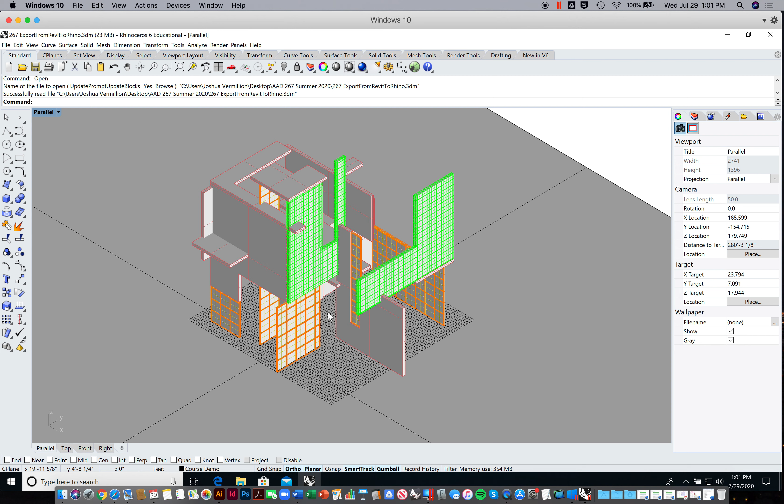You'll notice I'm in parallel view, but I have this ground plane and tile pattern I made on the ground plane from the plan view. This is set to parallel, so I'm going to go to the viewport, set view, and set it to perspective. That way I can easily see this thing.

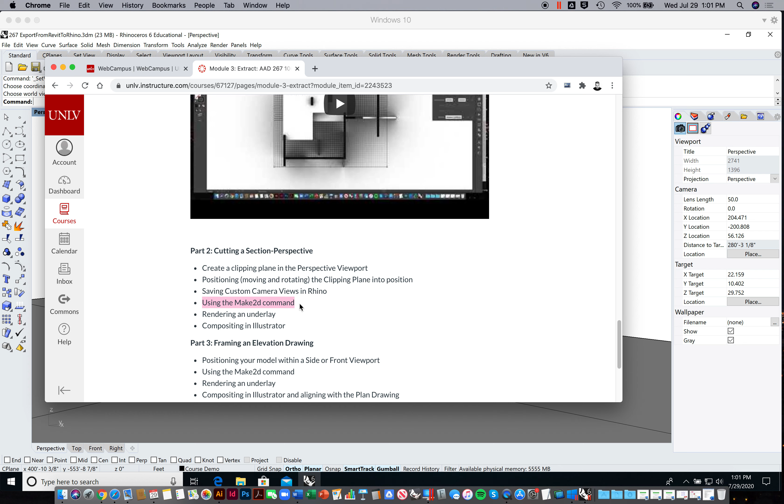I'm going to go through this outline quickly to make sure I get everything ready. We're going to create a clipping plane in the perspective viewport, move it into position, and pick the most interesting section perspective I can make. I'll save that view, which is really important. Then we'll cover these old things you're getting used to now: make 2D, rendering with soft shadows, and compositing everything back in Illustrator.

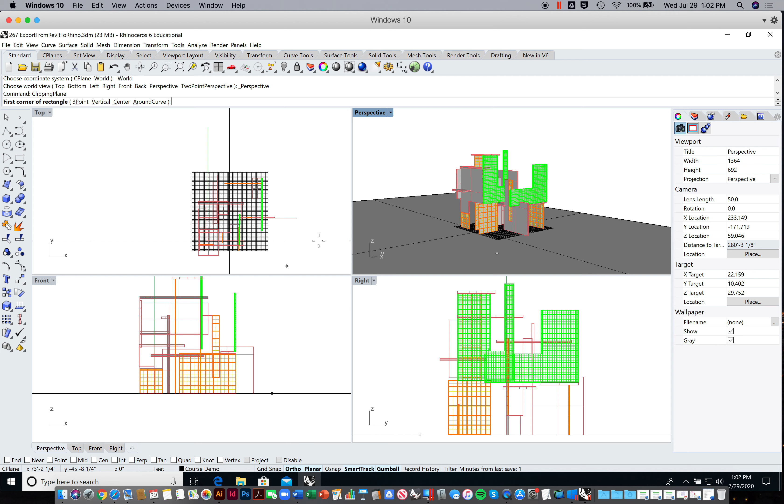I'm going to toggle back to my 4 views at once. In my perspective view, I'm going to type in clipping plane. It's going to ask me to draw my clipping plane. I'm going to draw it in one of my side views, like the right view. I'll just click and click. There's my clipping plane, and you can see it's showing up in the perspective view.

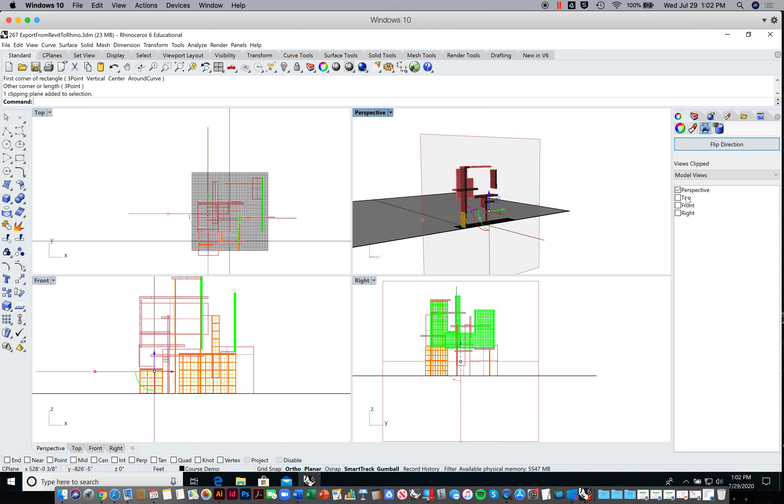I'm going to select my clipping plane. If for some reason it's not showing up in the right viewport or you need to change it, I can go to properties, go to the clipping plane properties, and change the direction that it's clipping. I can also change which viewport it's displaying in, so I make sure I have perspective clicked on, and double check this.

I'm going to position my screen, tumble around, and sort of center this up vertically. I'll also use the gumball to move that clipping plane a bit until I get an interesting place here. I'm cutting through a curtain wall, cutting through some vertical planes and horizontal planes, so walls and floors. I'm showing some things in the background. Most importantly, you want some sort of spatial and volumetric variety.

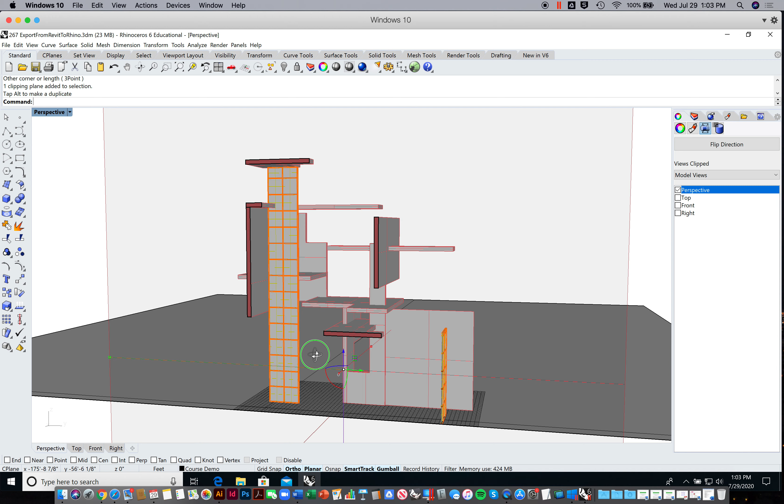So I have some multi-story spaces here. You can see balconies overlooking other balconies, and my floor plane extends out so the indoor space flows to the outside. Now I'm going to try to center this up a bit, centering it vertically as well, so the amount of space here is about similar to the amount of space here. I want to make sure my ground plane extends all the way through my viewport. That's important, and that looks pretty good.

Let's double check our checklist again: positioning, move the clipping plane. Once I have that exactly where I want it, I'm going to save this view. It's really important, because if I accidentally mess something up, I want to be able to go back to this view and do the make 2D or render and that kind of stuff.

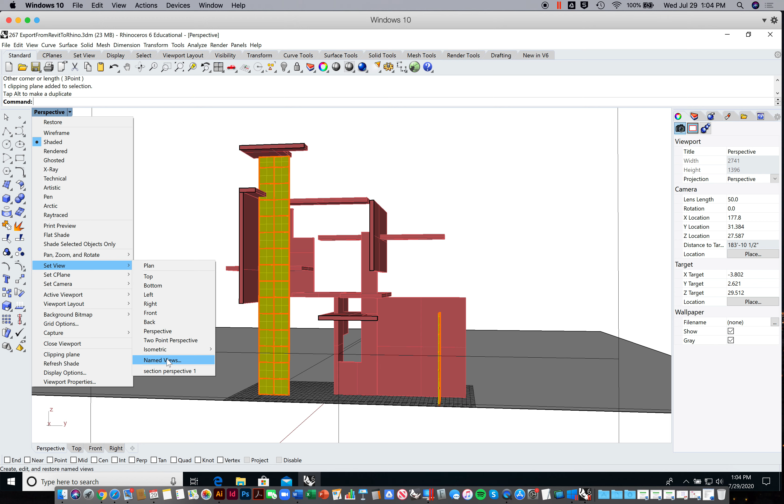So I'm going to go to my viewport label again, and back here where it says set view, I can change which direction I'm looking from and at, all the way down to named views. This brings up a box with a save icon, and I can click that. I'm just going to save the current view I have on my screen, and call this section perspective course test, just naming it so I know what it is.

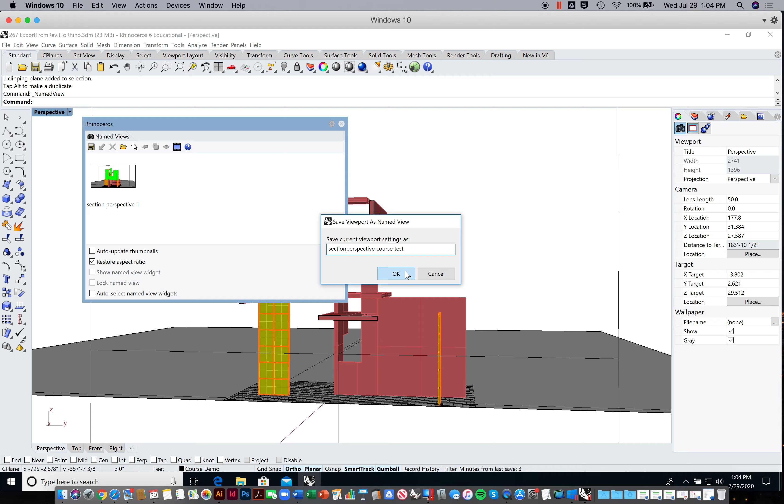Now, if I accidentally move my view around and get lost, I can always go back to the viewport label, go to set view, and all of the views I've saved are now listed along with top, bottom, left, right, front, back, perspective, and isometric. So there it is, the section perspective course test. I'm going to position that perfectly.

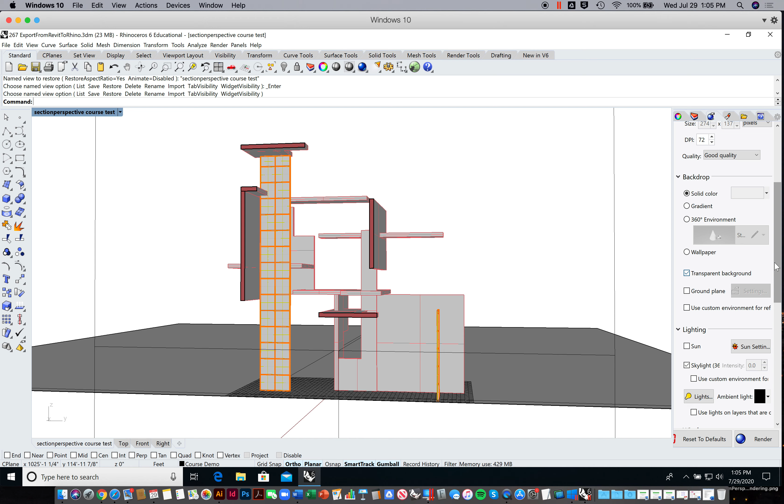Last but not least, I'm going to render and make a make 2D. I'll do the render first, going to the render properties on the right hand side. I make sure it's set to render the viewport at the same size as my viewport, quality set to good quality, transparent background on, sun turned off, skylight turned on, and then I'll go ahead and hit render.

This will take a minute or two, but once it's done, I can save this as a PNG file. That's really important, especially for this one, because we want to maintain that transparent background so everything above the horizon will be transparent behind our model. That makes it a lot easier to add a sky and things like that in Photoshop later, when we talk about adding entourage and blinging this thing out. It's almost done, didn't take too long, maybe 20 seconds left at most. As soon as it's done, I'm going to save, making sure to save as a PNG to preserve the alpha channel. Almost there, almost there.

And once we're done here, we'll also do the Make 2D and generate the line work that goes along with this. Just about there, look at that. Okay. As soon as it's gonna let me hit save, that's what I'm gonna do. I'm gonna double check this, make sure it's set to PNG, and I'll call this section perspective course demo 01. All right, there we are.

I've saved that rendering. I'm gonna be very careful to not move this viewport at all, right? And I'm going to go ahead and type in Make 2D. I'm going to select from right to left and try to select everything in this model, okay? And hit enter. I'm going to look at these very carefully. I want to make sure that it's rendering the current viewport, right? Tangent edges, clipping plane intersections, I want to make sure that's on. Viewport rectangle, I want to make sure that's on. And I'm going to hit OK once I'm done.